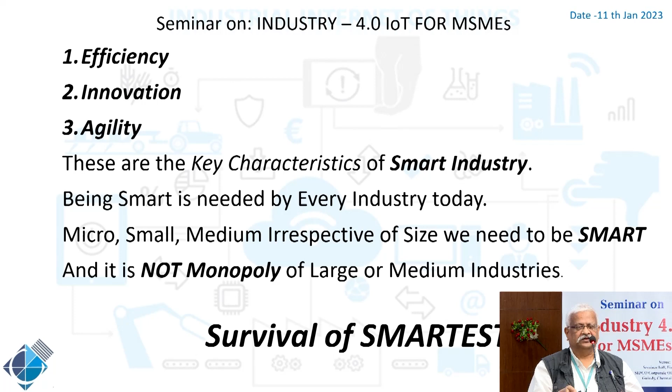Survival of the smartest - I think we should change 'survival of the fittest' to 'survival of the smartest' in terms of Industry 4.0 and for the manufacturing sector as such. Let's begin the journey to Industry 4.0. Revolution.

It has to come from determined people. Machines can only help. Equipment can only give you support. The software can give you only support. If it is not coming from within ourselves, The Industry 4.0 may not get implemented in your company.

Having clear milestones and achievables well defined, prepare your company for getting into Industry 4.0 mentally. That, of course, brings the fear that 'I have been watched' - your operators are going to feel that they are being watched.

This is going to be a transparent business, and in transparency, a lot of things are going to get exposed. So making your organization ready for this journey is one of the most important things.

Implementing step by step, in small steps. Every step will have difficulties and hurdles. We have to cross them with the help of experts.

Extracting data from the present machine - you are not going to change the machine to make your factory smart. Whatever machine you have, you are going to use it. Visualizing this data and establishing the reliability of it.

You cannot start big, taking data from all the machines at once, because establishing the reliability of the data would become a trouble. So start small, and analyze this data on the edge. To begin with, if we have finances, we can always go for cloud softwares. But to begin with, we can start doing the analytics on the edge itself.

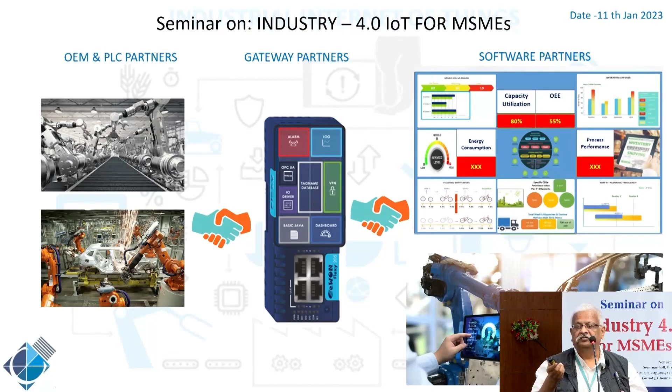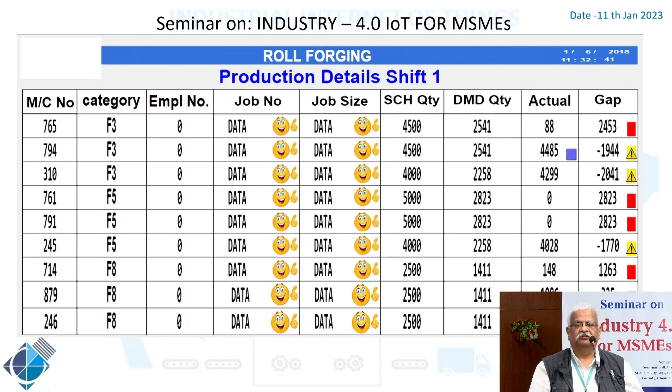Now the case studies. I would straight away jump to the case studies because that is going to make more sense. This is one example, done in Addison. I can show the name, that's not an issue. This was done almost about 4 years back.

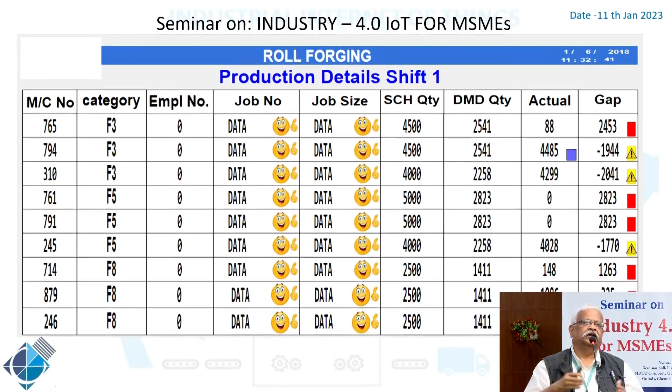You have 9 machines which are connected. The category of that machine has been given there, employee number will come there, and the works you are able to see there. This data is shown on a big screen in the factory, so that it works as an incentive to them, showing how much production was needed by now and how much we have achieved so far.

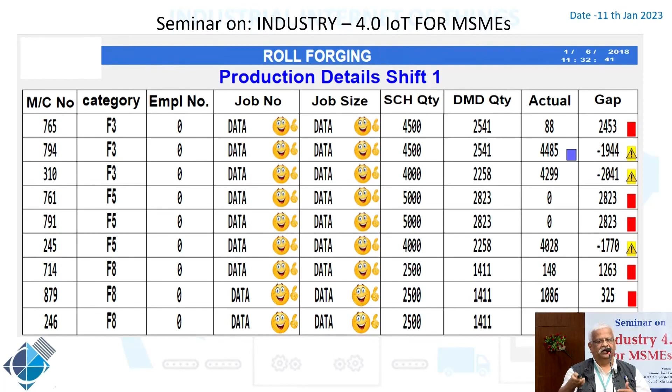The figures that will come here are all going to be simulated figures, they are not going to be the real time figures. This is another production monitoring which again gives incentive.

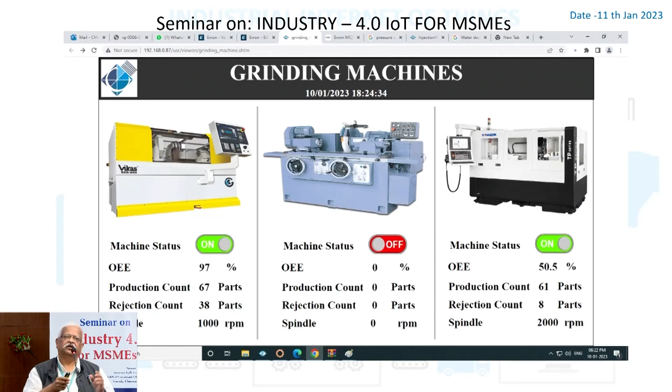Our edge devices are capable of giving all this data directly. You don't need anything additional than that. There are small softwares which are done on the edge devices.

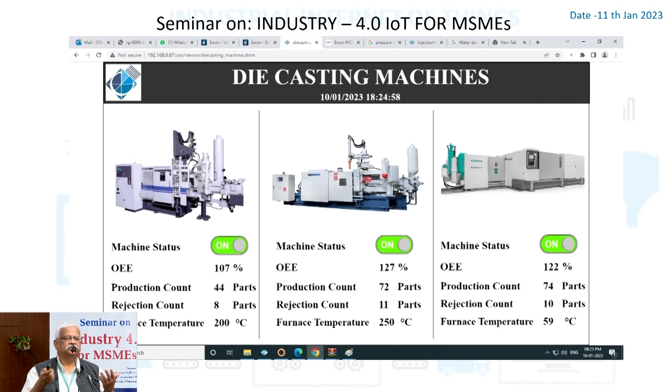Your die casting machine, in case of a die casting machine, you will need different parameters to be collected. Those parameters can be collected by our devices. I'll come to what our devices are.

The next example I'm going to take is for the injection molding machine. The data from the injection molding controller, or if a very old machine exists - presently I'm sure there are not very old injection molding machines, but if they exist, the data can be taken from the sensors directly. We have facility for that, and this data can be shown.

Now, this data is not only visible locally, this data is available on your smartphone also, from anywhere in the world. If you are allowing connectivity to the outside world for your data - some people don't allow that, that's the reason I said if you are allowing.

All these screens are possible. You will be able to see them wherever you are, provided you have access for them. It is not available for anybody and everybody, and the access control is quite strict.

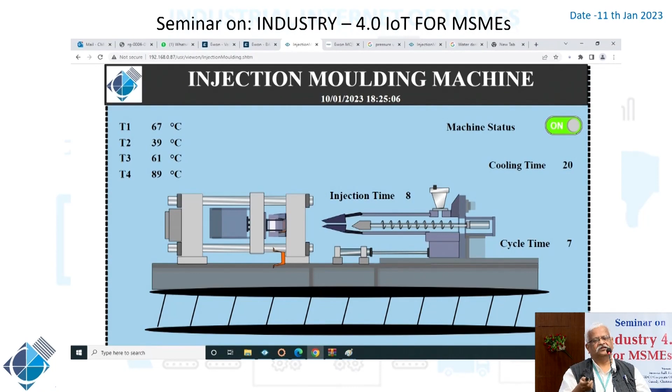Cyber security is quite important. As industry 4.0 gets into the shop floor, all our machines are going to get connected to the internet, and that means the possibility of hackers getting in increases. You are giving more possibilities of hacking because there are more machines which are connected. So the most important thing we should all work with is the highest cyber security.

There are various means of doing that, and manufacturing methods for getting cybersecurity certified. One of the cybersecurity measures we always use is, though we have access like cash withdrawal or something of that kind, there is always a next cross-check which comes in the form of OTP. We give facility for OTP as well, so that nobody can access your data so easily.

I'm taking a cyber security angle in between my examples. Is the data important that somebody sees? Is there going to be any problem? Maybe. Your competitor might utilize it, but it's not a big problem if the data is being seen. But if somebody takes over control of your equipment, that's a trouble. Five years back, if somebody said your PLC is going to get hacked over the internet, nobody would have believed it. But today we know factories have been brought to a standstill by attacking PLCs. So cyber security is one of the important factors which is a must today.

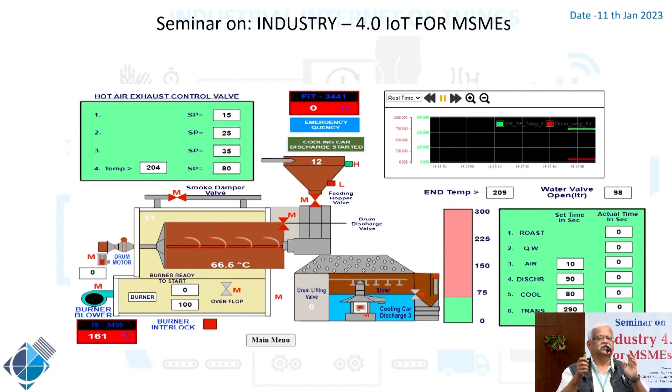This is an example of a small manufacturing unit related to food and beverage. You can see the entire plant, the bar graphs, virtually whatever data you need. This data is also available for the general manager on his smartphone.

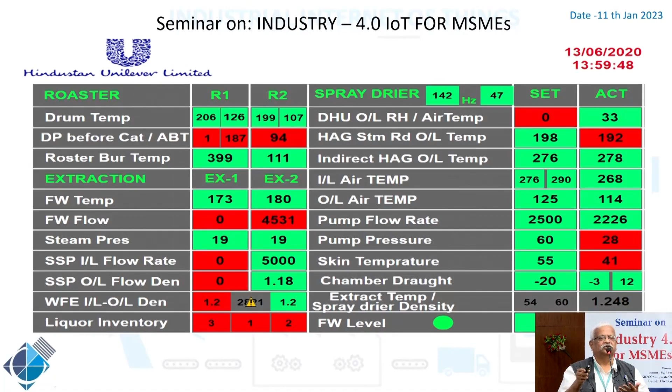This is another way of it. Hindustan Unilever has permitted me to show only this slide because there are many slides related to them. But anybody in industry where you need to see the data and realize whether everything is all right or not, at a glance you'll be able to see there are some reds and some greens, so you'll know what is red and work on it. Now, access to be given to whom and for what data can be decided by you.

It's up to you to decide whether the MD should see everything or only filtered data. He needs to know in the evening what is production, is there any downtime, are dispatches being stopped because of downtime. Beyond that he need not know. Whereas a maintenance manager or GM, or the person who looks after maintenance—since size can differ and there may not be a manager—he should know immediately that the machine is down. This is work we have done for Biocon.

Biocon's manufacturing facility operates at temperatures of -18 to -22, and temperature going beyond this limit is trouble for them. The batch manufactured during the time when temperatures were higher than -18 could get into trouble, and those batches might have to be rejected. That's the reason this is being monitored very strictly.

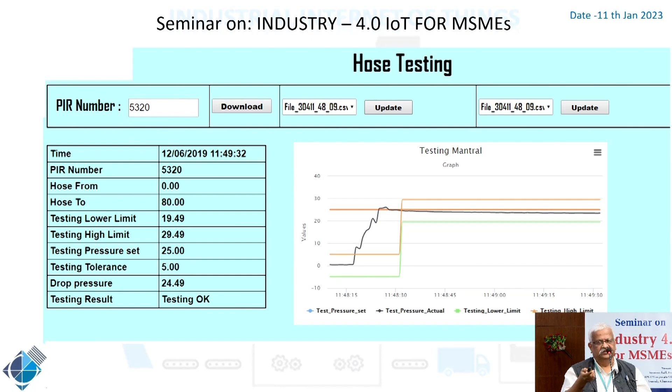Again, at midnight, this is created as an email from the edge device directly and posted to certain email IDs, and this data remains with them—you don't have to make any production sheet ready, you don't have to enter any data as such. Everything is being collected and put onto this.

Apart from production QC, you have utilities, and you need to monitor the utilities. This is one example of utility being monitored—this is for the generator and the fuel level of the generator.

Many of our customers who use more than 500 kilowatt generators lease them from some company or the other, and the leasing company uses these kinds of possibilities. In fact, this includes even the geolocation—so if the generator is moved from one location to another, the leasing company comes to know that this is what has happened.

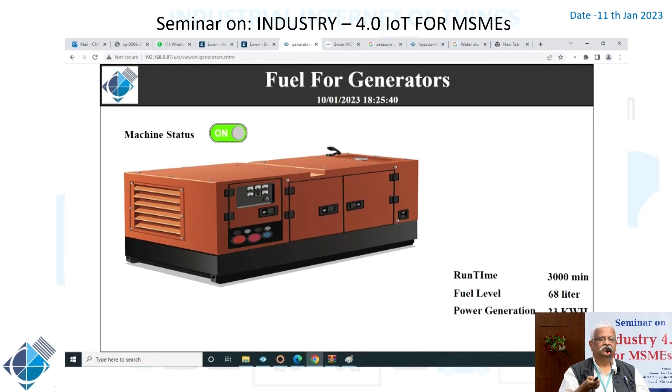Another example for compressed air. This was done for TVS Motor Company, and the graph has been made to make sure you know what's happening. Demand of compressed air is being monitored, and at the same time the total flow and energy being calculated and integrated together, you are able to get the cost of the air yesterday. Of course it's not 1.86, as I said it's a simulated figure. So you have many examples and applications being catered, and these things are possible only because of Industry 4.0 and the equipment related to it.

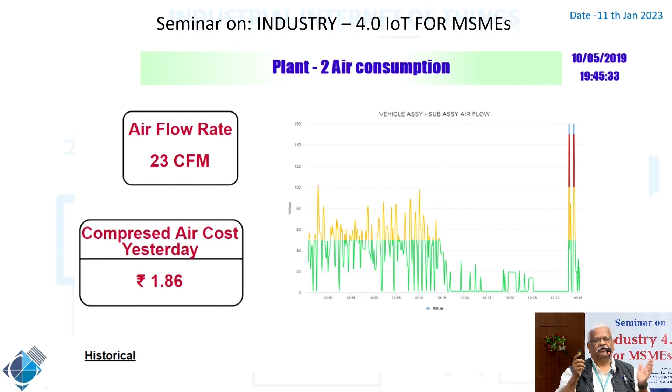This can be implemented in your factory whether you have one machine, two machines, 20 machines, or 100 machines. It doesn't matter. Scaling up is very easy.

Benchmark for good maintenance - one more point I want to highlight is mean time between failure. We have been always trying to find out the stoppage of the machine, how much time it was stopped, and how many times it was stopped. At the same time, there's one more benchmark we should track as an OEM and as a user: mean time to repair. And it is possible - anything is possible. Once you have the data, everything can be calculated.

Why do we do analysis? Why should we do such analysis? See, unless you analyze, you cannot improve. And unless you monitor, you cannot analyze.

Now analytics can lead our factories to really smart factories, and AI, which is a big word - artificial intelligence - can come into the place. One of the biggest examples we discussed earlier in the morning, one of the biggest examples for AI that all of us use, is Google Maps. Google Maps gives you direction, not only direction, but it tells you on a Monday morning at 9 o'clock at Mount Road, what will be the traffic.

And this is only because the data has been collected over the last 6, 7 years and being analyzed. On a Sunday, if it's the 15th of August, which area would get more crowded? That data is also available. And it cannot come unless you have huge data being taken and analyzed. Once the data is there, you can do analysis by any means, any ways, any pivot, whatever you call it. But you need data.